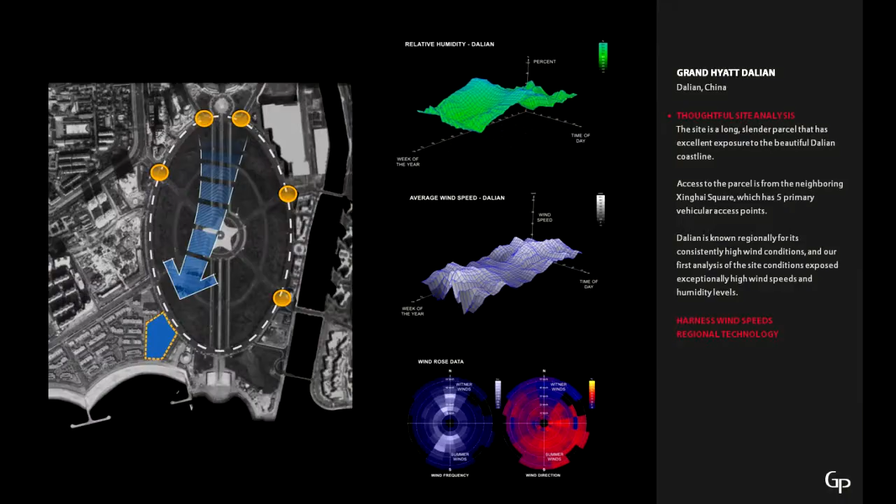Dalian, I didn't know much about until we started working on the project. I did know that it was controlled by the Russians previously, as well as the Japanese. It's recognized as the northernmost 4-season port in China, which is just some of the things I knew going into it. But as we started to talk, things you learned were that the wind patterns were fairly aggressive in this particular part of the world, sitting right on the coastline.

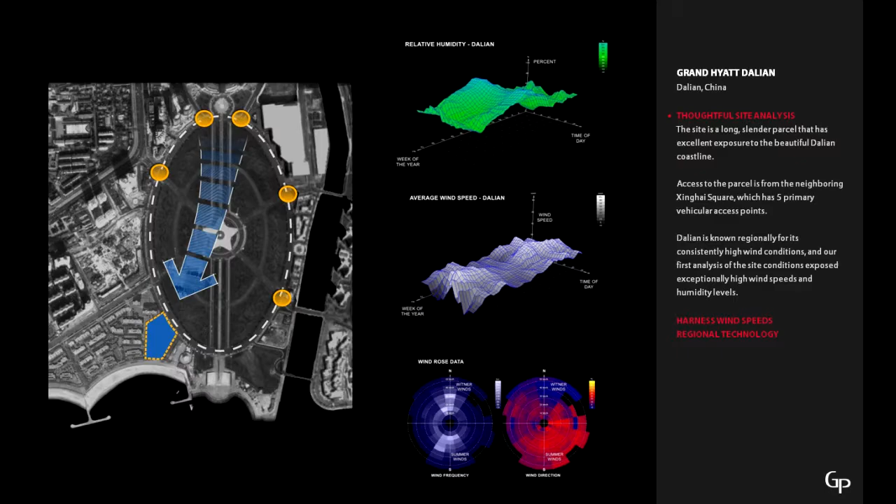Actually, our site is a very slender, tall, long and linear site. It obviously takes advantage of the views of the water, but it also sits off of one of the largest squares in Dalian itself.

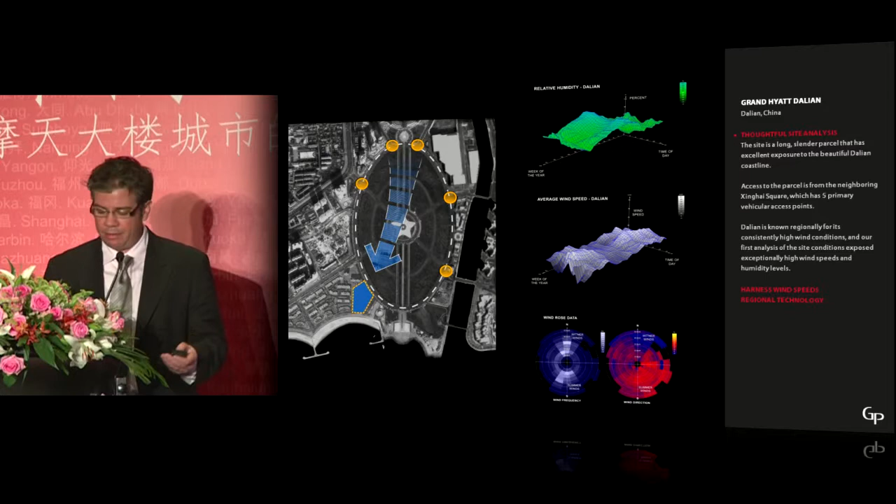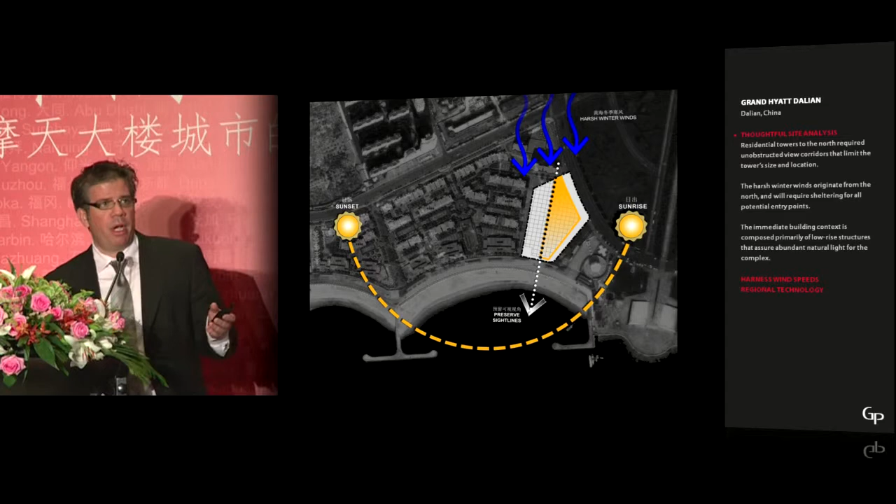So we did some initial studies, obviously trying to understand the solar environment, the wind environment, the humidity levels, but very minimal at first. Really what we were focused on was trying to be a good neighbor, in all honesty. We're surrounded by a number of residential towers to the north of our project, and we also have a large public amenity, which is this Xinghai Square, that we really wanted to allow to still embrace the water's edge.

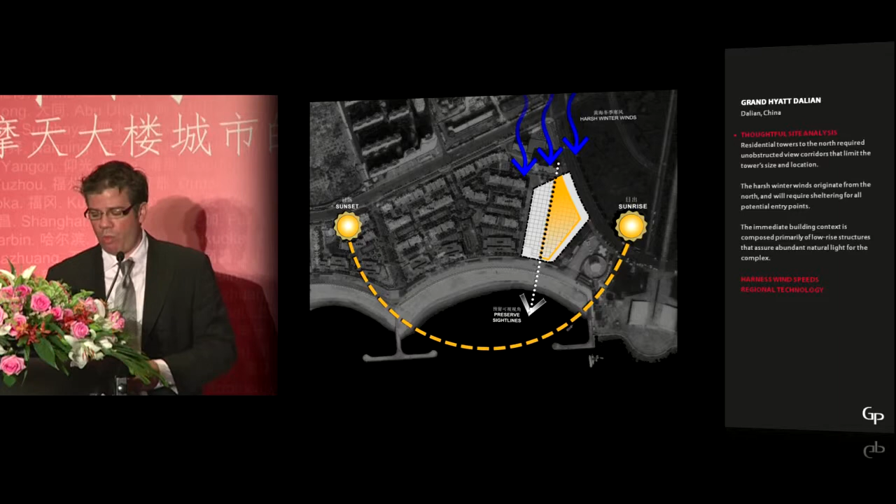So as we started to look at it, our long, slender site actually got even more slender and more long. The orange area is really what we ended up thinking about as where the tower location should start to be located, to be a good neighbor.

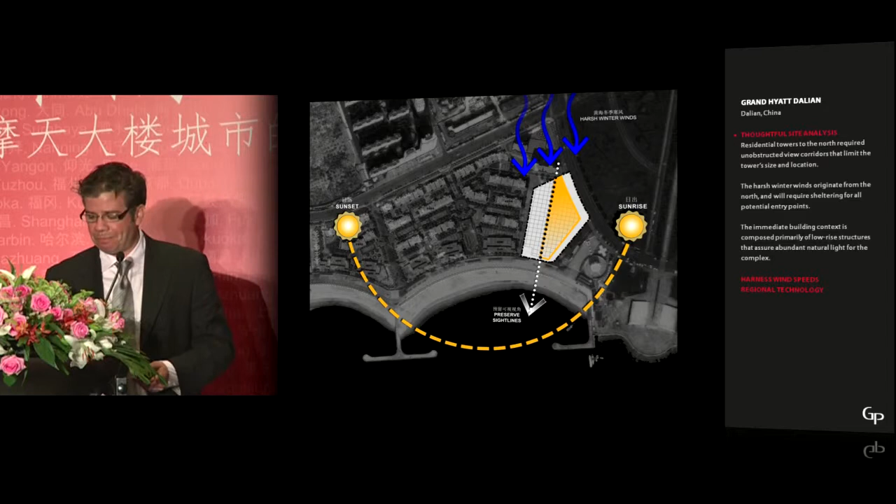As we started to look at the tower and layer into the program, which, as I mentioned, is primarily a hotel program, we developed more of a triangulated shaped plan. This obviously allowed for a single-loaded condition where all the rooms got to take advantage of the views out to the water. It allowed us to decentralize the core, which gave us a great stiffener in this particular program.

It also allowed us to put all the circulation for the project on the north side of the building, which is the area that looks back onto the city and over the main square. You can see the core is kind of a nested core, so it allows for the lower zone to drop off, and that creates this super punch at the top of the building. That super punch is just a reflection of the stacking of the building itself.

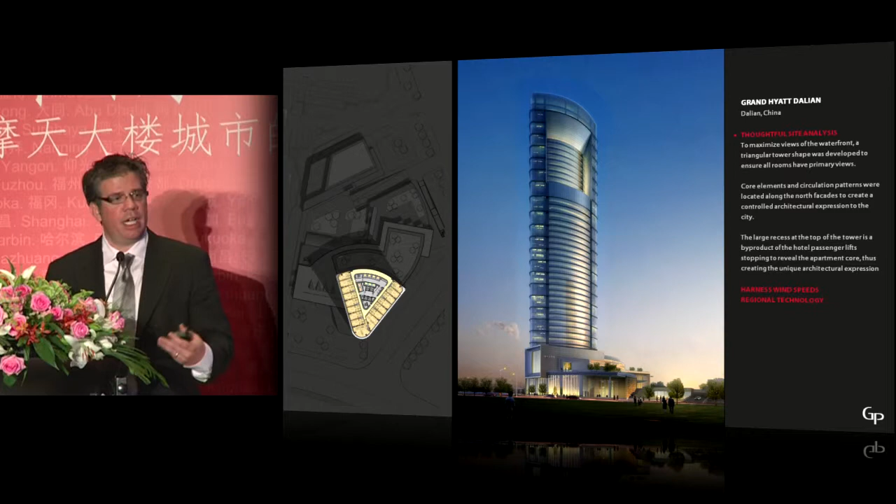One of the things we wanted to make sure was that with the circulation facing back to the city, it had a consistent aesthetic even at nighttime, so it didn't provide a sense of chaos that sometimes hospitality and residential buildings can give a certain level of chaos.

But from the water's edge, this is what would be faced. The amenity is really to look out onto the water. In this case, we've used some sun shading devices to help minimize the solar gain in the summertime.

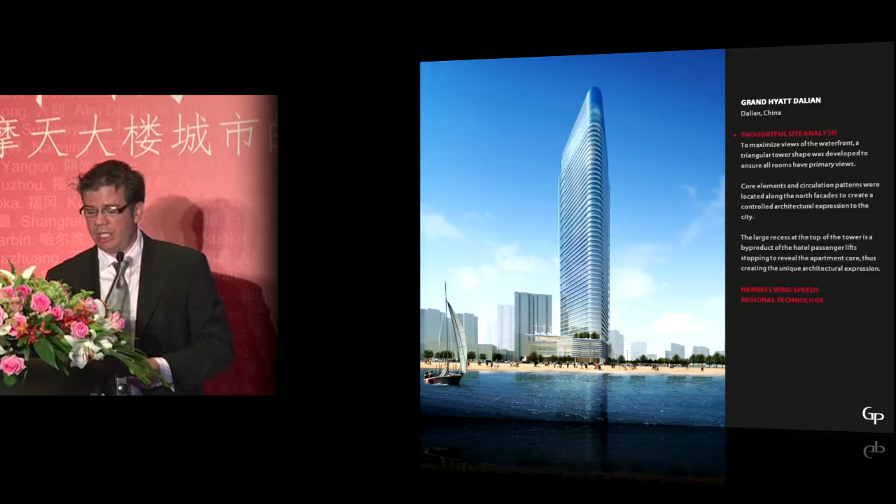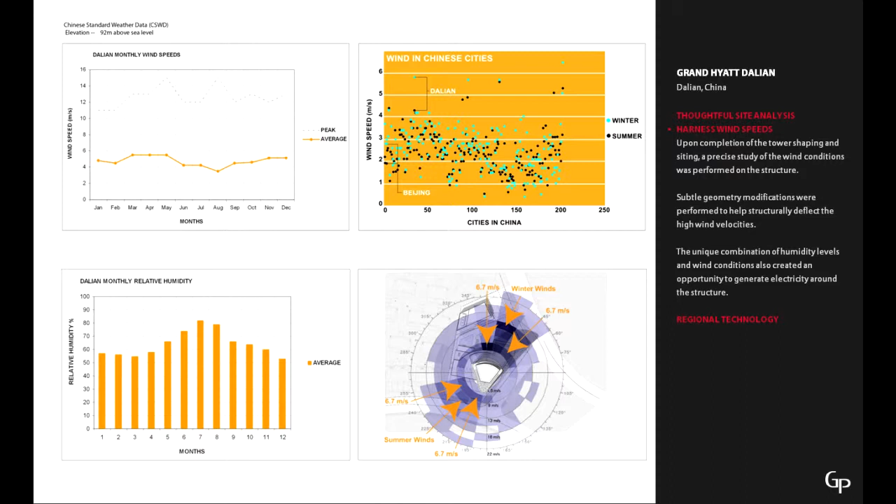But what we really started to find was that the wind conditions in this part of the world became very large drivers for the structure of our building. Even though we had identified a triangular floor plate driven by being a good neighbor and providing views out to the water, we needed to study that structure as it related to the wind forces in the area.

What we found was that the original suspicions were extremely accurate, in that the average wind speeds were in excess of 4 meters per second throughout the year, peaking at times of 14 meters per second. The humidity levels were extremely high. Obviously it's a coastal environment, but the humidity coupled with the wind speeds creates an incredible amount of force, and the air becomes very strong air.

It's not weak air. So as we started to understand what those forces are, we needed to look at how those forces informed our building, how we wanted to orient it as the winds change throughout the year. Since we're on a coastal environment, it's very consistent.

As we started to finalize the shape of the building and the structure, we really understood that we were creating quite a shedding effect on the northeast and northwest corners of the building. Even in the wintertime, when the winds come from the north and shed across the bow of the building, an incredible amount of activity occurs at that corner.

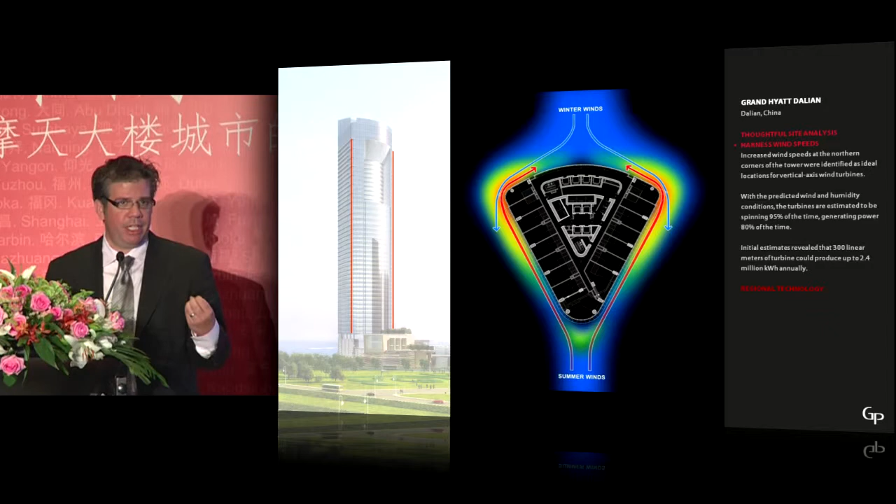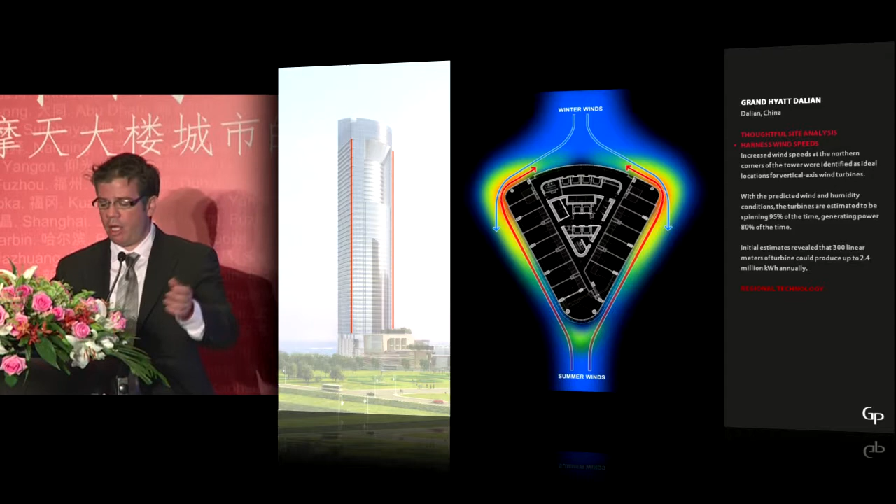In the summer, in the southern times, this wind bathes itself across the long dimension of the triangles and still creates this kind of vortexing quality at these corners. This was a particularly interesting concept because we thought there was potential to actually use the wind power to generate energy for our buildings.

So we started to look at a logical location for wind turbines on the corners of the building. Initial thoughts were that we could get 300 linear meters of turbine there, with a very aggressive goal of over 2 million kilowatt hours per year. As we come to find, those initial estimates can be a little aggressive.

But as we started to develop, we wanted to find a turbine that was befitting of the character of the site. In this case, we looked at a helix design. This helix wind design has more of a nautilus shape, which we felt was very in keeping with the kind of coastal environment we're working in at this location.

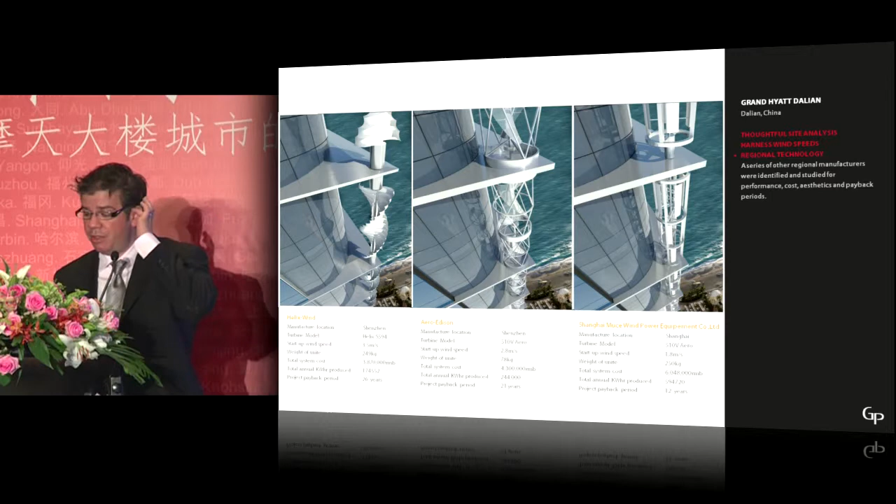It worked in a 2-story type of scenario, and some of the things we really cared about were that it was constant speed, bird-friendly, vibration-free, so it made a lot of sense, and it's a very low maintenance type of element. But we wanted to think about other opportunities.

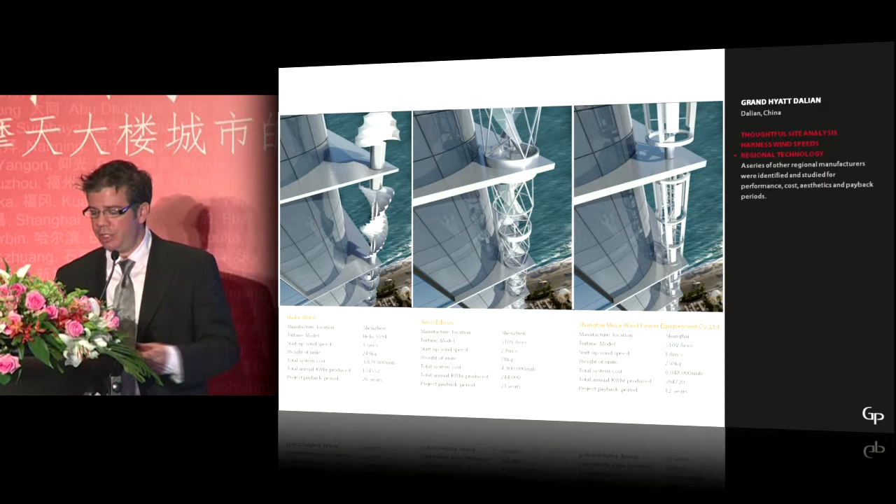That would be regionally manufactured, it's very easy to find other products within the Chinese marketplace that offer different solutions to the same problem. One of the things we started to look at were these different products and what their startup speed requirements were, making sure the average wind speed in this environment was able to exceed those requirements.

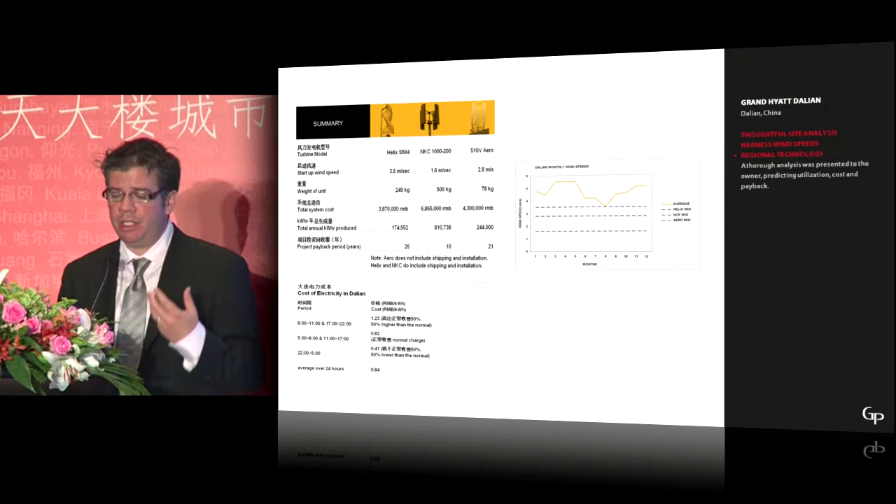What is the weight of these different turbines, and what's the impact back on the base building? What's the total cost of the system? And then ultimately, what's the value of the kilowatt hours they can produce, determining a payback period so the owner and investors can understand when they can get a return on that investment, as opposed to simply contributing it back to the grid.

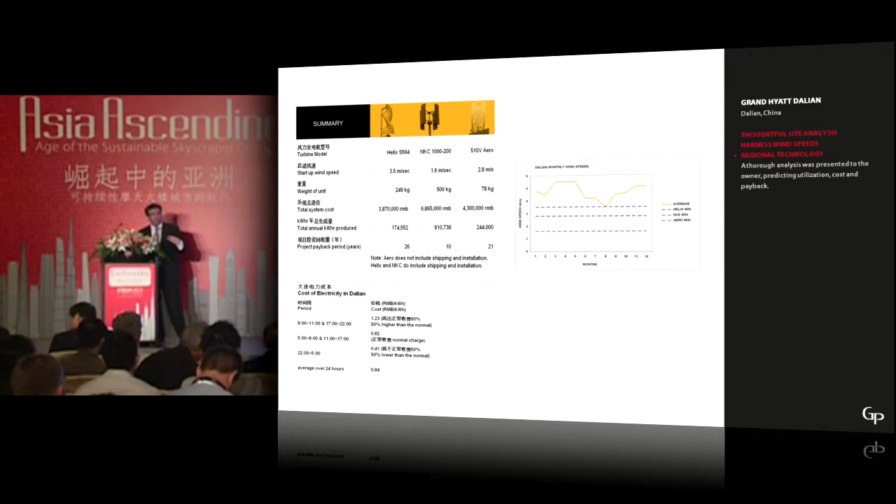We were able to identify that it could be within 10 years that your return on investment could be brought back in, even with the regulated energy costs that are in Dalian today.

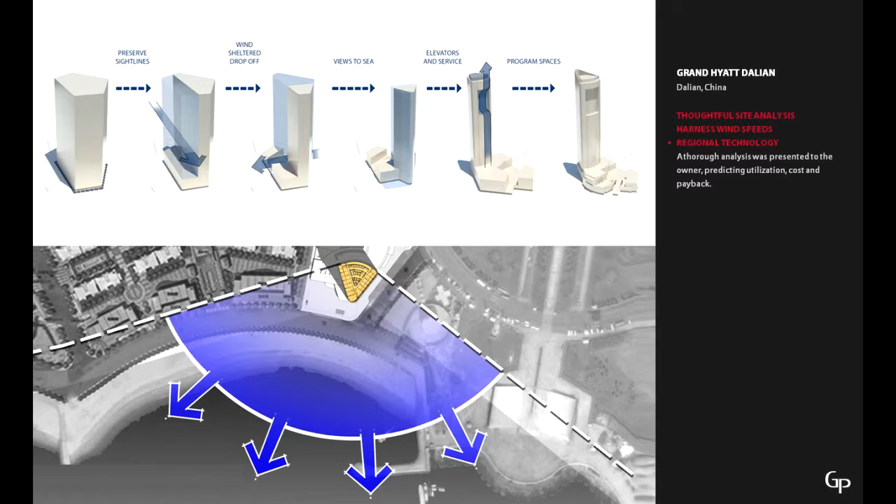So it was an interesting little case study, in our opinion, that we went into a project where we were enamored by the site, and we're working with a hotel program and a tower program, that we just wanted to simply be a good neighbor and to maximize views to the waterfront. But at the same time, what we found was a way that we could start to generate electricity with the project in a very natural way, not forcing some type of environmental token onto the building, but having it be a development of the natural process of the project. And that's how I think we feel most natural when we're working on some of these corporate projects that we do.

And then, of course, this is the state of construction where it's out there right now. The curtain wall is being tested and the shading devices are being identified.

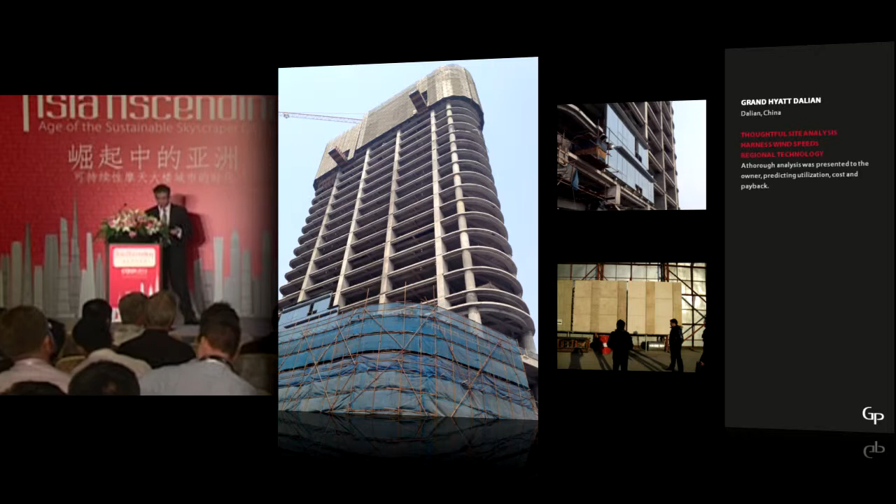The second project is one that's on a completely different scale. And this one is in Abu Dhabi. And obviously you always have preconceived notions about what your site is going to bring to you. Anybody that's ever been to the UAE or the Middle East in general knows that the solar conditions in that part of the world are overwhelming. So we knew that going into this project, and had the mindset to tackle that as a challenge before we even started looking at the project. And what you can see here is an early-on artist rendering of what our project really is.

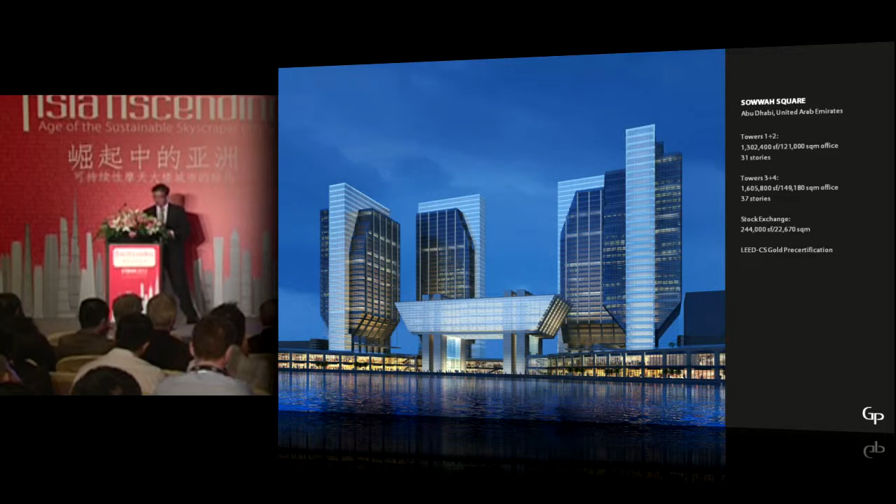The ambitions were for a modern stock exchange for the UAE to become the economic center of that region, and then to surround that stock exchange with 4 Class A speculative office buildings that could house some of the most elevated corporate names in the world, and in essence start to become the commercial center for the region. This is all surrounded by, or sits on top of, a man-made island connecting to multiple infrastructure projects, but this is really the signature piece, the financial strength behind the overall project.

And so as we started to think about the project, you start to think about how do you take a Class A office building which really wants to have floor-to-ceiling glass, wants to maximize transparency, wants to maximize flexibility, efficient structure. How do you start to take some of these concepts and recognize the solar challenges that are associated with this particular climate? And it became something that was very exciting for our office to start to tackle.

Some of the issues that we looked at obviously were shading systems and photovoltaics, which become very heavy players in this particular project. But actually there's an innovative use of double skin that I think is quite innovative and quite thoughtful in this solution. I'm going to walk you through a couple of the different concepts for the building.

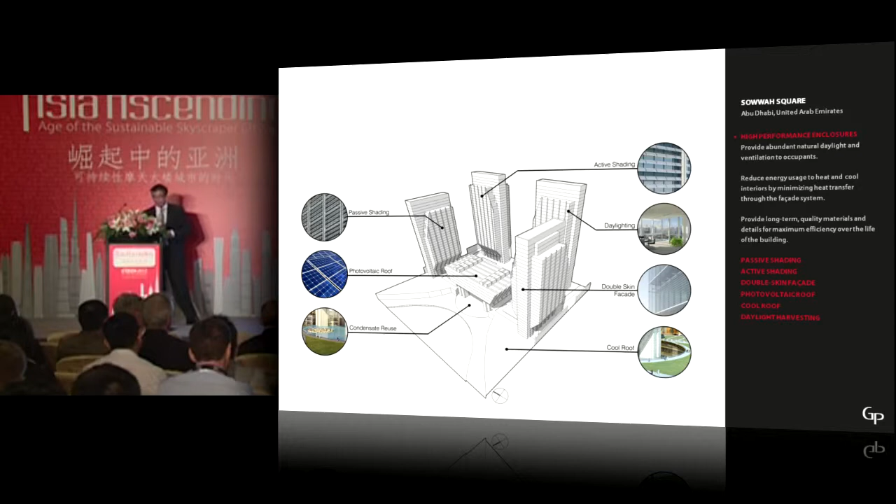So of course on the southern facades of the building, we've designed an array of passive shading devices, glass fritted elements, 750 millimeters deep, fixed on the exterior of the building, spaced so that it can recognize and deflect the solar radiation off of the primary skin of the building. Obviously, they're aligned to work with the view lines from within inside the building, but also allowing to get maximum transparency.

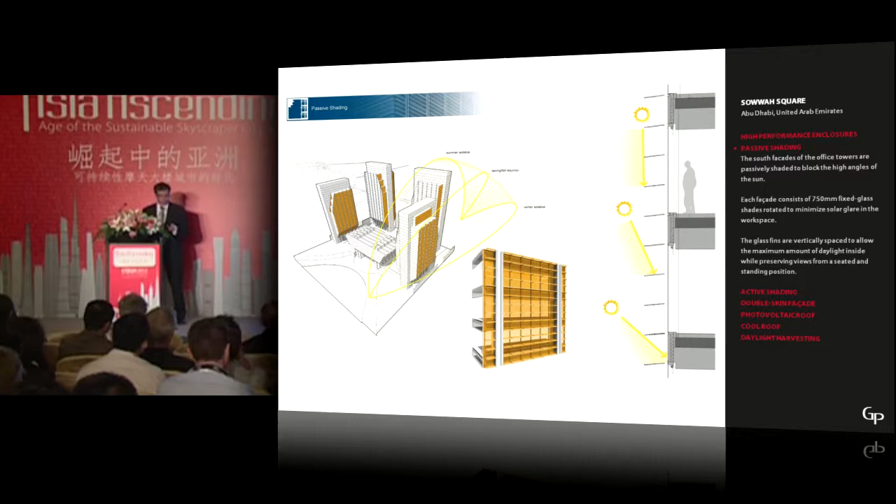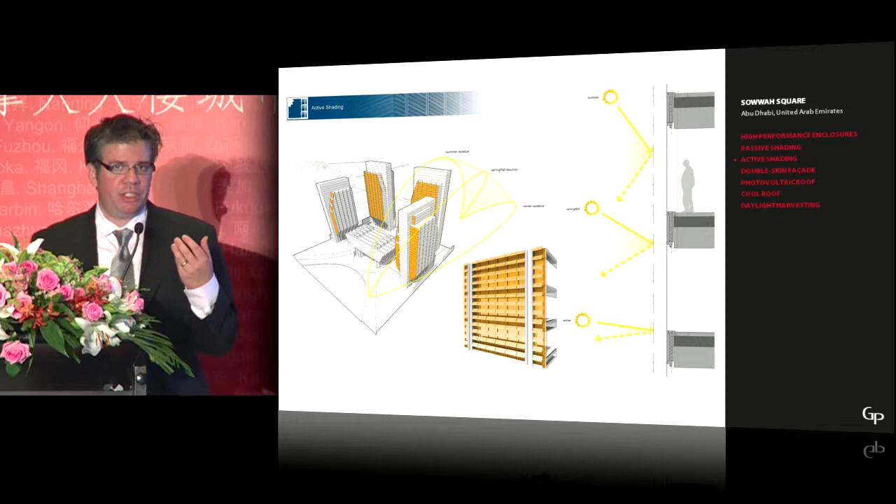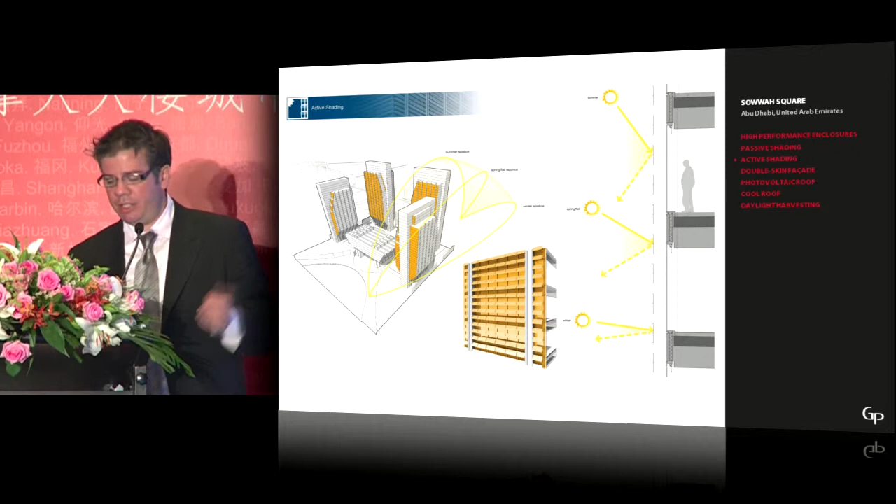But on the east and west facades, a fixed system really is not a sound solution. So what we actually had to do was look at more of an active solution. These active shading elements are the same size and the same density, but they actually move with the motion of the sun and are able to be more intelligent of a facade as it works with the overall building, while maintaining the controls of the system in the sand-free environment behind the enclosure.

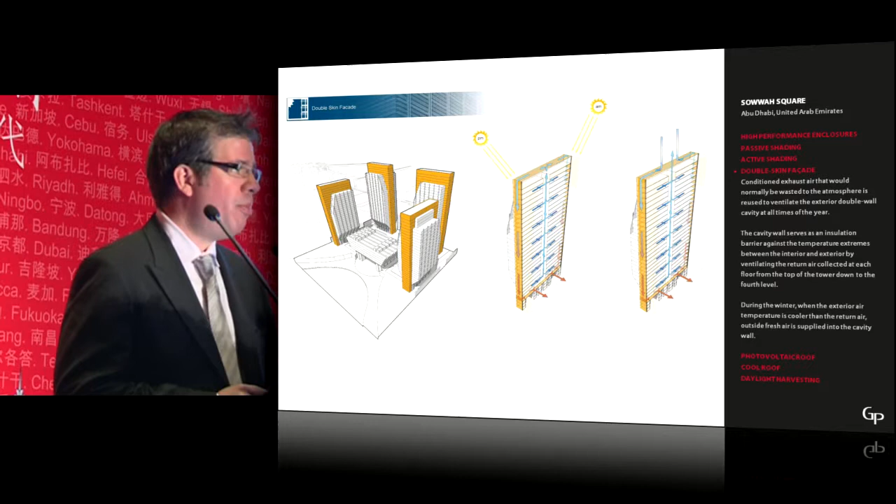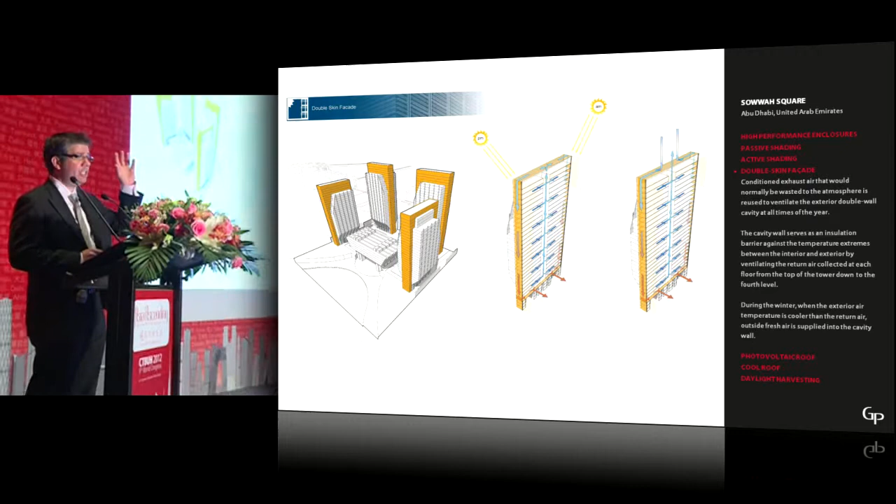But the third feature was actually really associated with the core of the building. The core is obviously not only the structural backbone of the building, but it's also the engine in which most of the building breathes. Most of the air is circulated either to or from that core element, and then is rejected up through and given out into the atmosphere.

One of the interesting things about this particular climate is that the ambient temperature is so hot at certain portions of the year that the air we're rejecting out of the building is actually cooler than the ambient air in the overall environment itself. So the question to us was, is it possible to use that?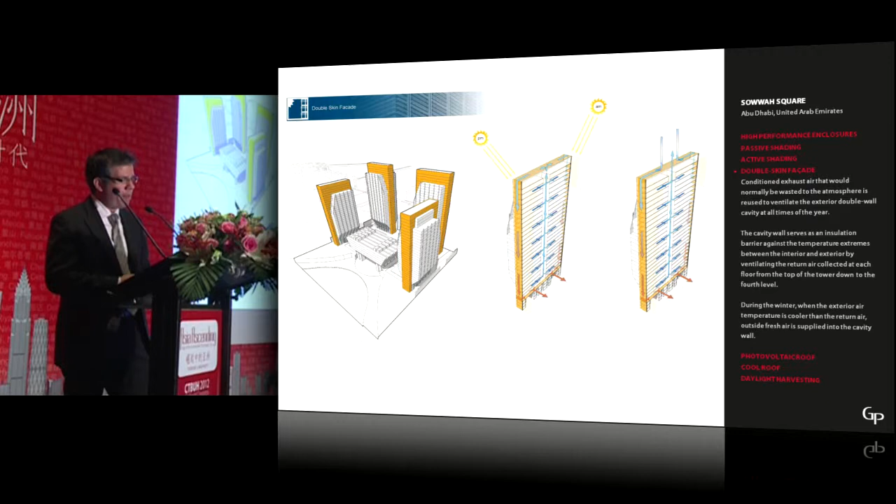Insulation is such a key element in creating a very strong U value for your enclosure. So we looked at studying a new type of double wall system here, and it really is the central spine or backbone of the building, kind of cladding that core space. And what it has allowed us to do was mitigate the ambient temperatures, which can get up to 120 degrees Fahrenheit, versus our Class A office.

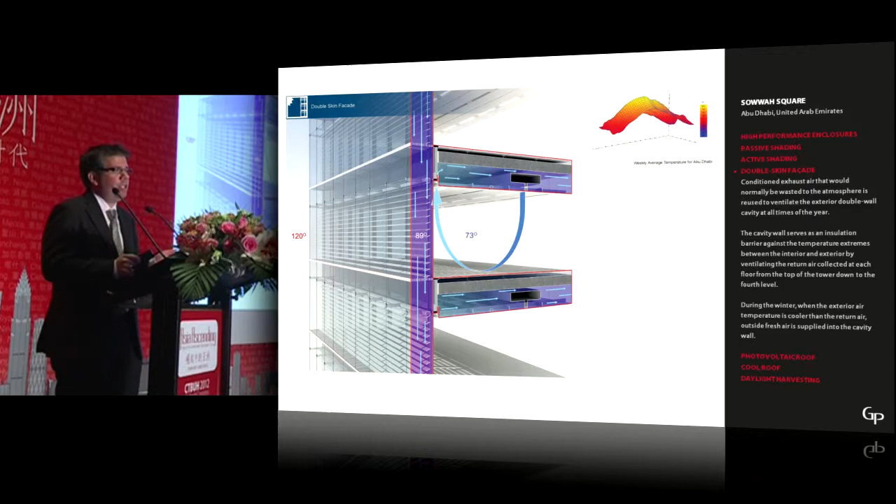With Westerners using the space who are really going to declare that it needs to be in the 72, 73 degree Fahrenheit range, we can take that exchange air, that exhaust air, which is coming out in the neighborhood of around 90 to 95 degrees, and use that as a buffer between the outside air and our internal air.

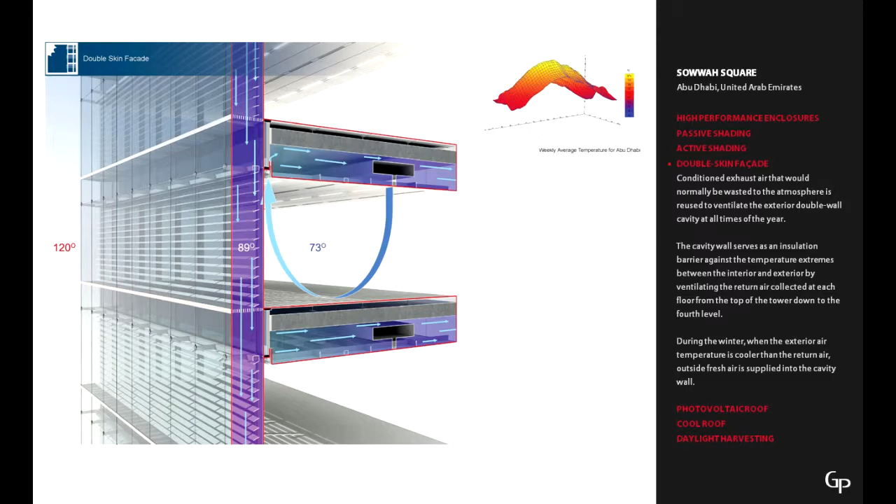This also provided us an opportunity to use external shading. That external shading can be in a sand-free environment, and it can also use that shading to keep it off the primary surface of the enclosure as well. So it was kind of an interesting way of thinking about how you use air and push air through an enclosure to combat the existing climate.

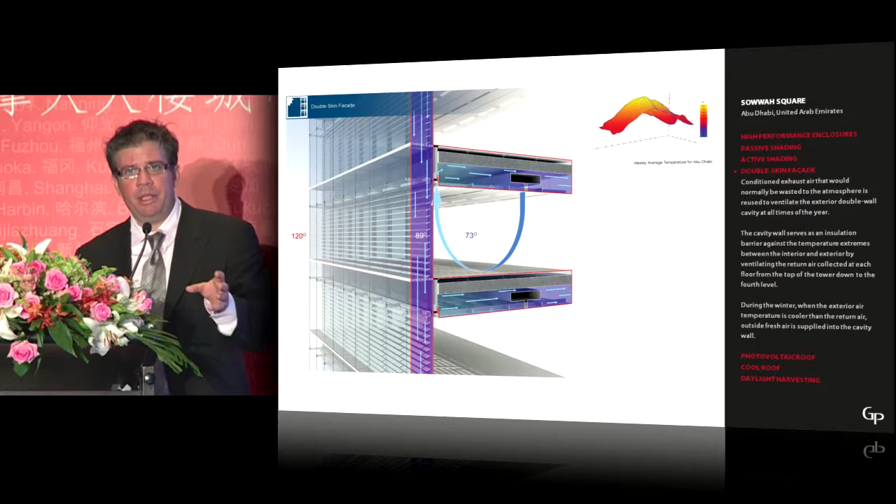Of course, in the winter months when the air is cooler, we can actually bring that air in at the base of the double wall and use it for a different purpose in those months of the year. But really, what you're battling is the solar radiation and the dramatic heat of this particular location.

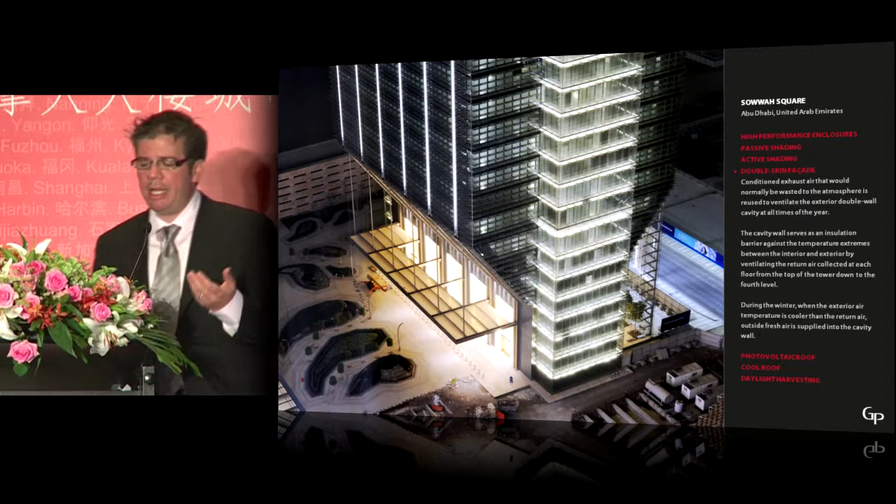Still able to bring a full sense of transparency, but using technology to overcome that base desire for the building.

And then finally, I think the one that everybody immediately associates with this environment is the opportunity to harness energy basically from the sun. And here, we didn't try to clad the buildings with photovoltaics and the like. What we actually looked at was just attacking the roof. And the roof in this situation is for the stock exchange itself.

That roof is over 2,800 square meters, in essence, a football field, or an American football field. And this concept was really the idea that you can have free, unobstructed, natural solar light hitting you throughout the entire day. So we simply arrayed a field of photovoltaic panels about 1.5 meters up off the primary roof surface, for easy maintenance, easy cleaning, easy replacement, and also to shield all of the conduit and devices coming out of it.

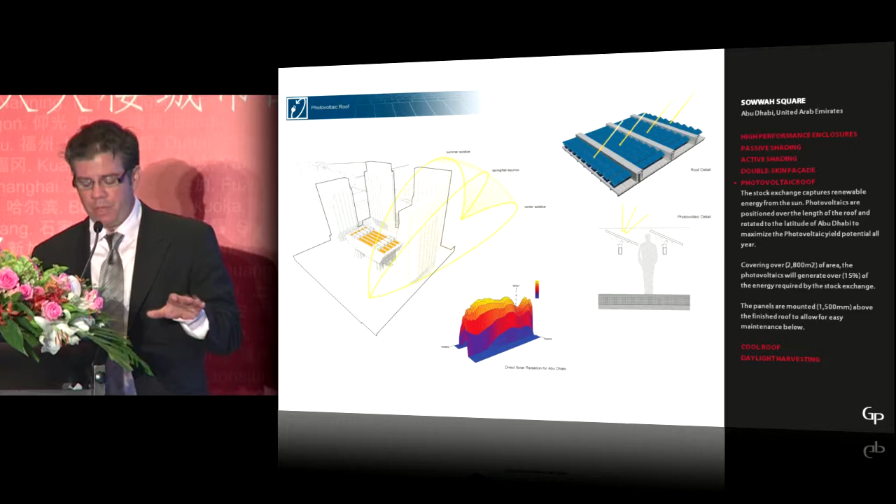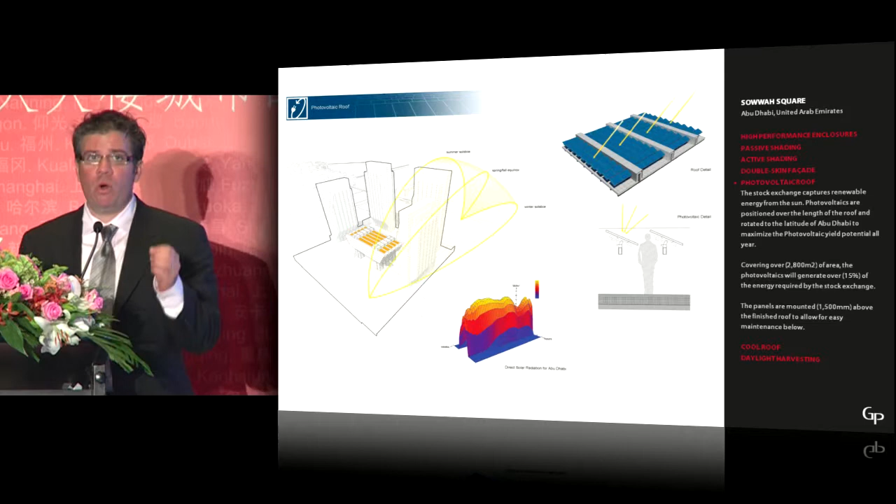But located on the rooftop, we then needed to study how this related to our speculative office developments around it, ensuring it was going to get the type of exposure we were predicting, or hoping for, in this particular area.

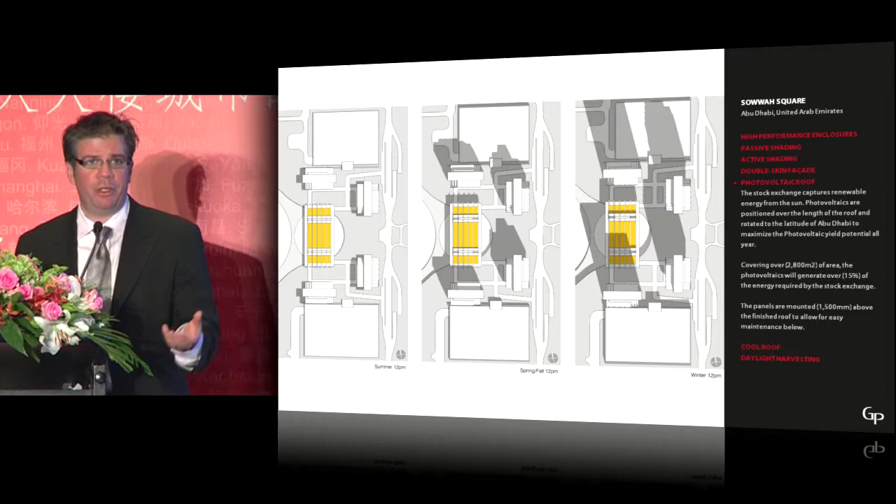And the goal, a realistic goal, is that this football field worth of photovoltaics can provide 15% of the electricity required for that particular building. And as you know, in that environment, electricity and energy can come at a much different rate than we get in different parts of the world.

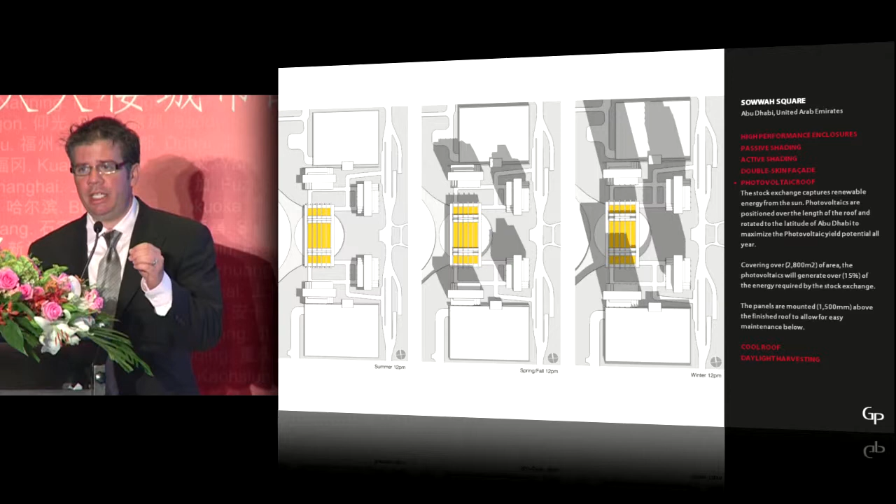And the third project is from our hometown in Chicago. Chicago has some different issues in that land use is starting to get more and more dense, not quite like Asian density, but it is starting to become more of a reality.

Our original client came to us with the desire to do a high-rise office tower, but they had a parcel of land that was valuable and fabulous within the Chicago environment, sitting on what would become Millennium Park. But they had a vision that they wanted to expand their corporate square footage, almost double in a 10-year period of time. And so the natural solution was to look for parcels of land that could satisfy an additional building in the future, but land values are extremely high, obviously, in Chicago.

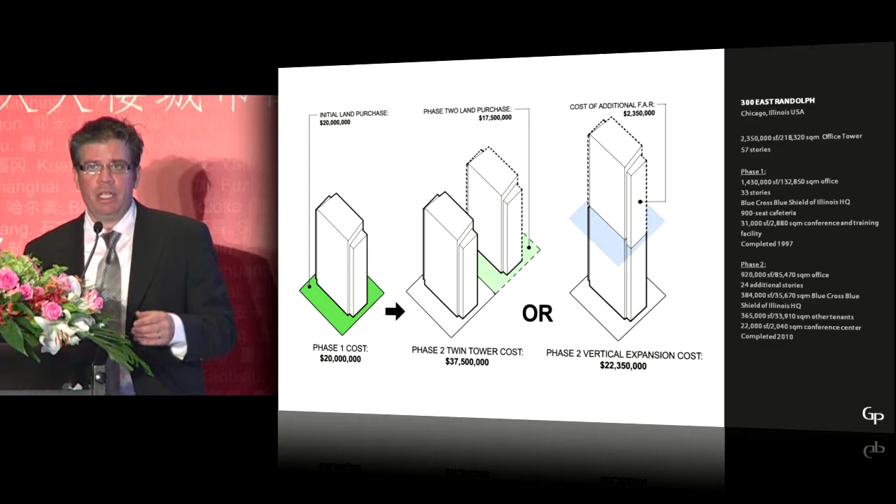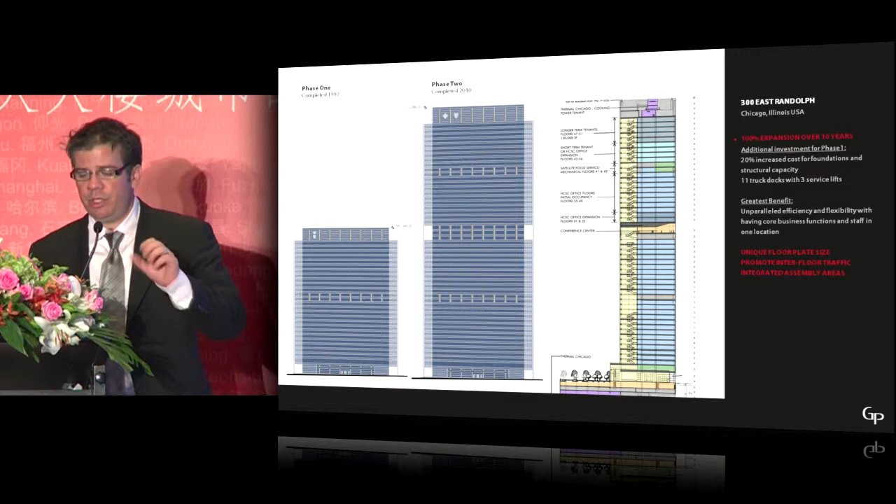So our original proposal was actually to look at the value of the air above them and think about doing a vertical expansion as opposed to a horizontal expansion. The investment versus the land versus air rights was quite self-explanatory. So what needed to be done was design an office building, in this case, that could grow almost double its size. First phase was completed in 1997, and second phase was just completed in 2010.

But the building story is more about the vertical expansion itself and how we did that. They had a unique desire. This is a build-to-suit building, so it's a 36,000 square foot footprint, which is a little bit larger, and they wanted some open spaces within the overall plan.

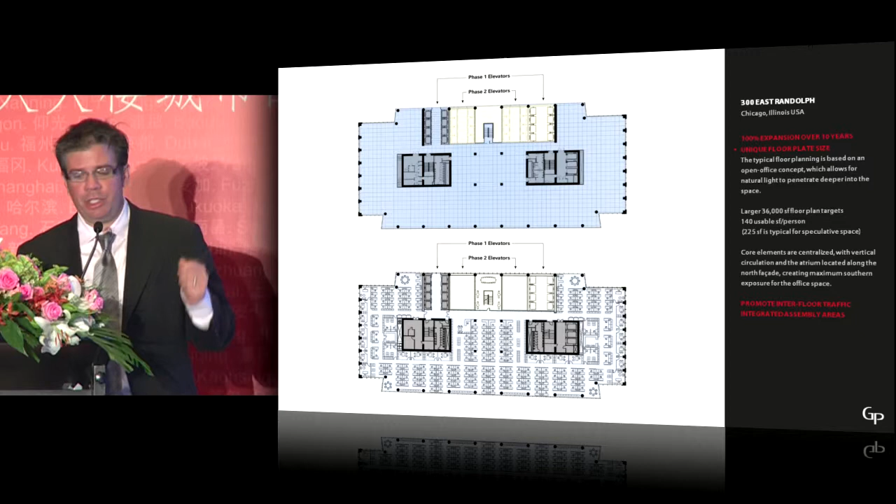So you have very deep lease space, which works very well for their particular needs. But 5 cells on the north side of the building were then carved out for atrium spaces that would run the full length of the building. And in this situation, our office elevators then are broken down into 4 zones.

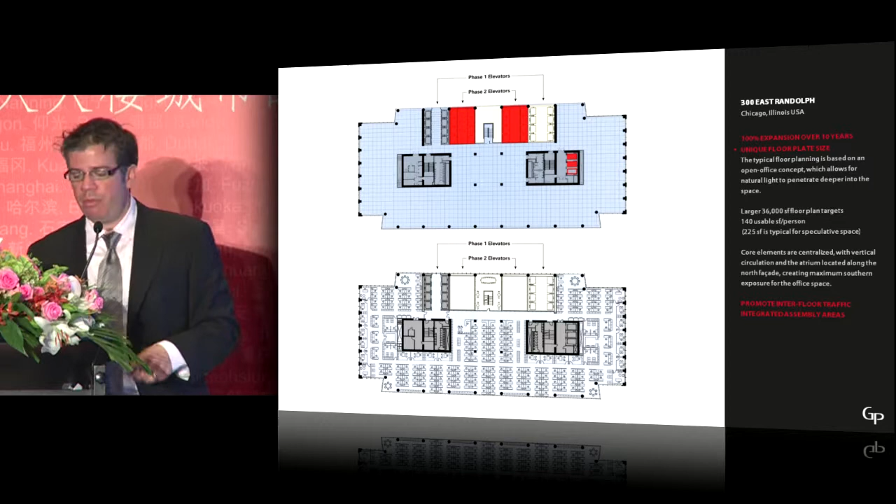As you can see, the phase 1 elevators are on the outermost zones of these 5 cells, and then phase 2 lifts would then inhabit 2 of those other atriums, and then the central atrium, of course, would be remained intact for the entire duration of the project. And this is kind of the phasing of it.

So these atriums, which are amenities, bring in natural light, give you opportunities to have interfloor interconnectivity, became the backbone for how you could double a building in size. Extremely interesting concept, but at the same time, it allowed for you to participate with the elevatoring system.

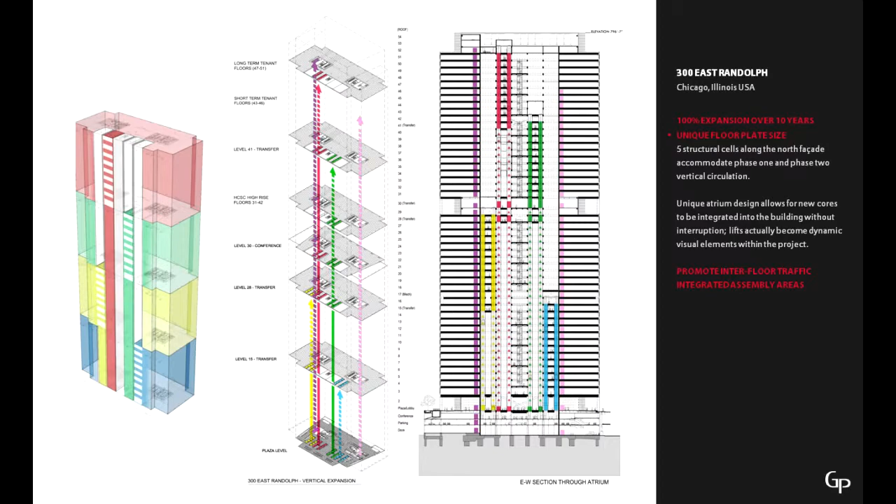As you can see in some of these images here, the elevators can go up and down through the space. It's not a traditional building in that your core is completely hidden from how you function within the project. And that gave us the opportunity to really animate these atrium spaces and to give opportunities.

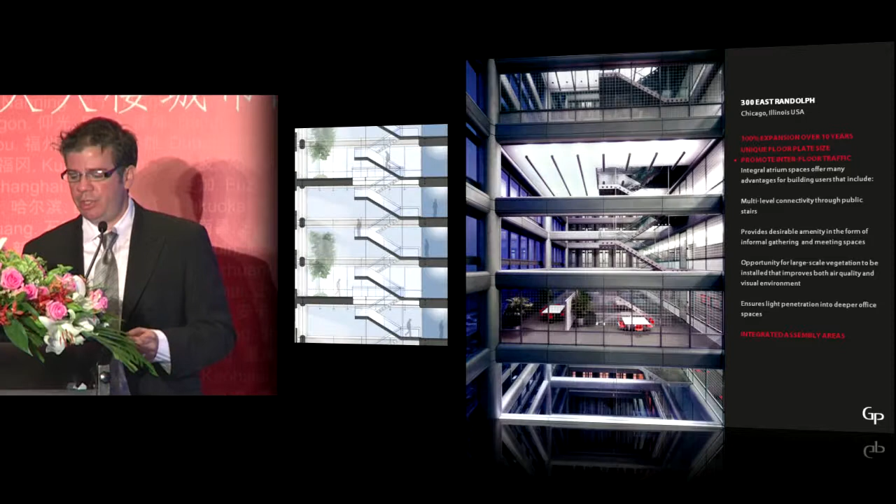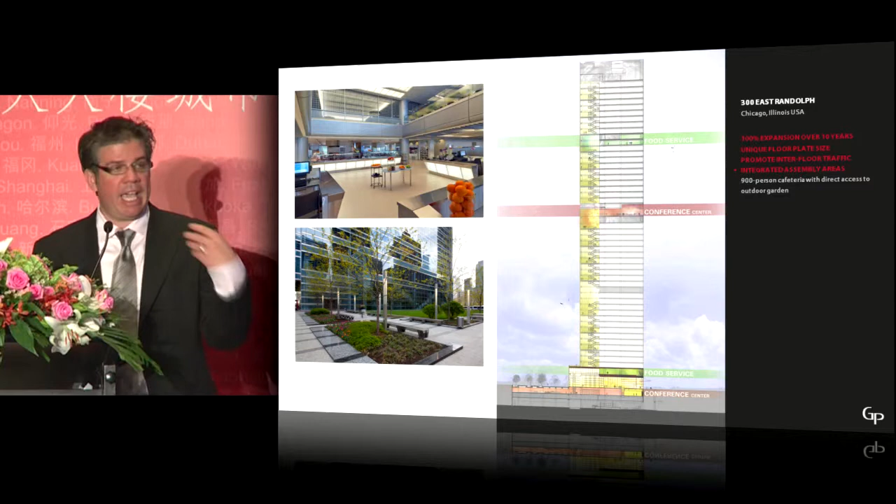Additionally, the found space was quite interesting. So the cooling towers were pulled out and replaced on the top of the building. That was turned into large conference centers. Because of high-rise capabilities, we were able to develop a series of cafeteria, canteen spaces that are high up in the building, taking advantage of some of this found space and creating more destinations within the tower.

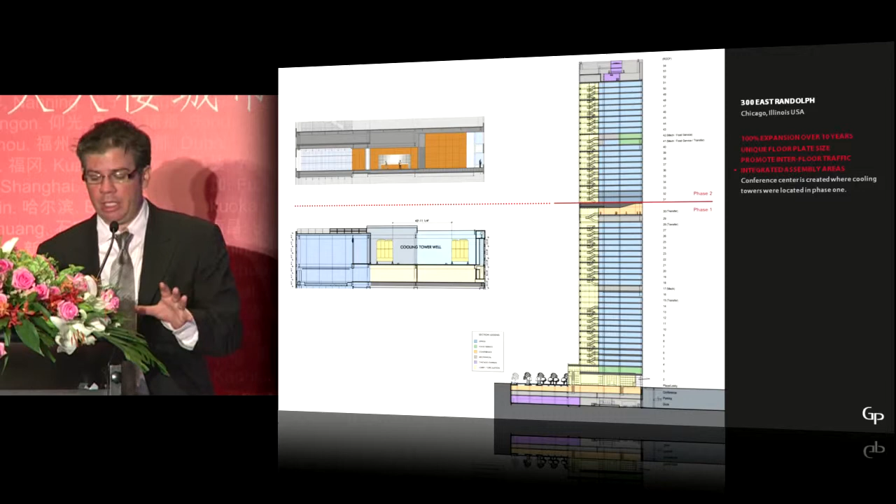And I personally love the idea that the cooling tower location previously has now become a large conference center with some of the most commanding views and the most sought-after rent in the city of Chicago today.